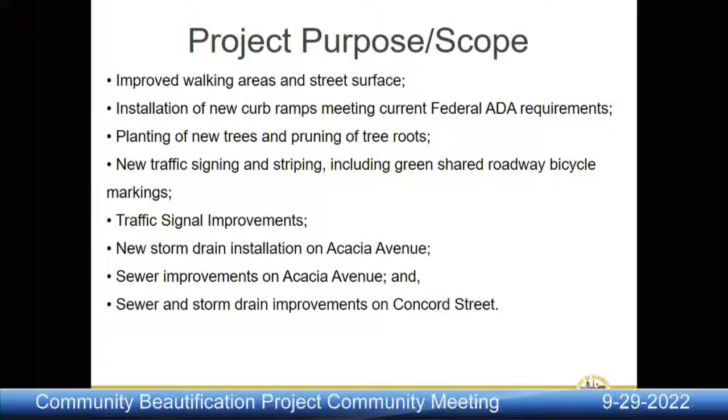Project purpose includes improved walking areas and street surfaces, installation of new curb ramps meeting current federal Americans with Disabilities Act requirements, planting of new trees and pruning of tree roots, new traffic signing and striping installations including green shared roadway bicycle markings, traffic signal improvements, new storm drain installations on Acacia Avenue, sewer improvements on Acacia Avenue, and sewer and storm drain improvements on Concord Street.

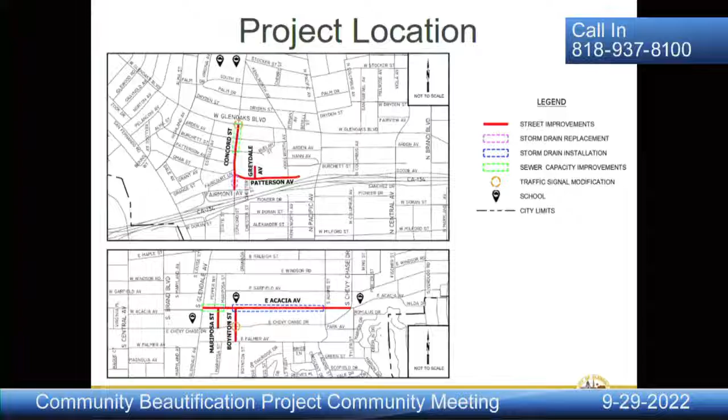Project location: as you can see on this project location map, the project takes place on Concord Street between Fairmont Avenue and Glenoaks Boulevard, Patterson Avenue between Concord Street and Easterly End, Greydale Avenue between Patterson Avenue and Northerly End, as well as another location on Acacia Avenue between Glendale Avenue and Chevy Chase Drive, Mariposa Street between Chevy Chase Drive and Acacia Avenue, and Boynton Street between Palmer Avenue and Acacia Avenue.

Construction phasing: there are 8 phases that will roll out as part of this project. Phase 1 will include all the underground improvements, including sewer and storm drain improvements. Phase 2 will entail concrete improvements. Phase 3 will include asphalt pavement replacements. Phase 4 will include street resurfacing.

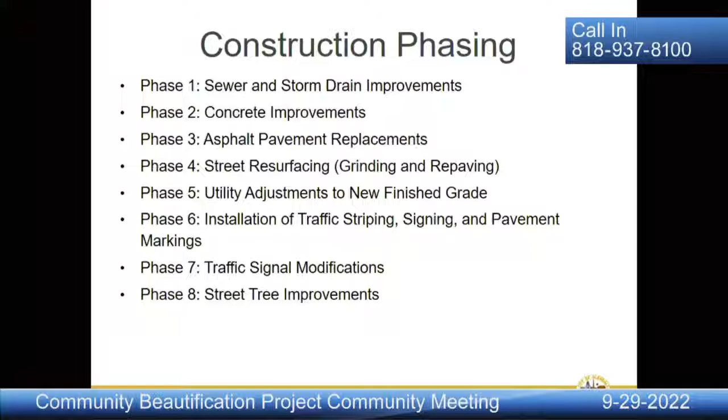Phase 5 will include utility adjustments. Phase 6 will include installation of traffic striping, signing, and pavement markings. Phase 7 will include traffic signal modifications, and the last phase will be street tree improvements. We will go over the phases and details in the following slides.

Sewer capacity improvements include replacement of approximately 580 feet of 18-inch vitrified clay pipe with 21-inch VCP on Concord Street between Burchett Street and Glenoaks Boulevard. It will also include replacement of approximately 535 feet of 8-inch vitrified clay pipe with 10-inch vitrified clay pipe on Acacia Avenue between Glendale Avenue and Mariposa Street.

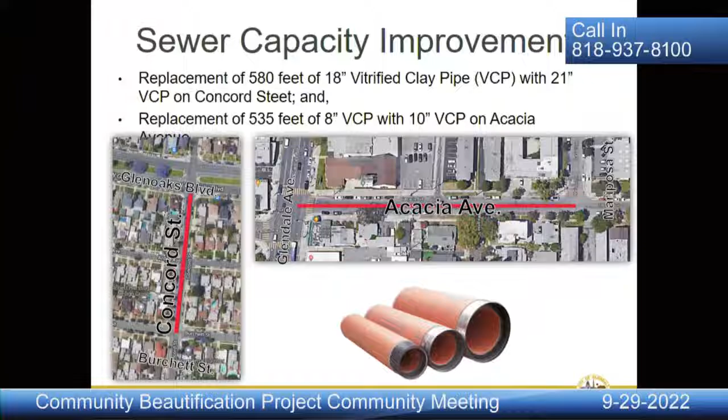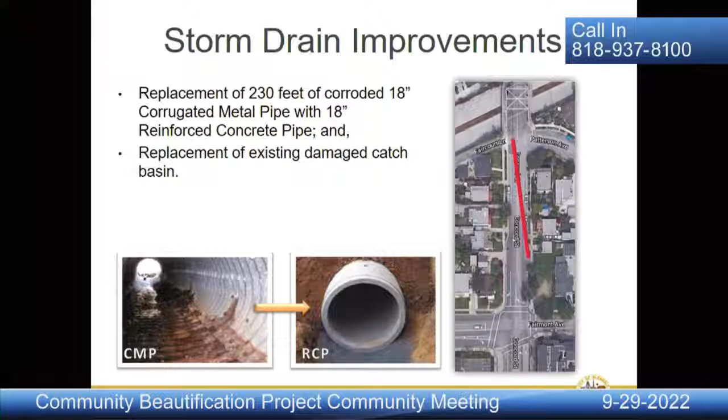Storm drain improvements include the replacement of about 230 feet of corroded 18-inch corrugated metal pipe with 18-inch reinforced concrete pipe on Concord Street between Fairmont Avenue and Faircourt Lane, or Patterson Avenue. It also includes the replacement of the existing damaged catch basin that the pipe connects to.

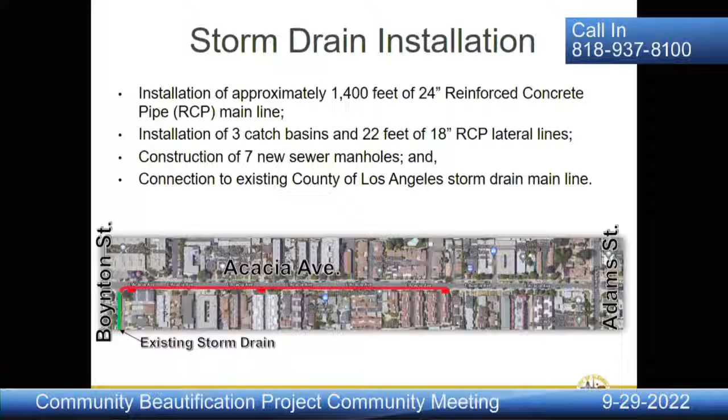Storm drain installation includes approximately 1,400 feet of 24-inch reinforced concrete pipe installation on Acacia Avenue between Boynton Street and Adams Street, as well as installation of 3 catch basins and 7 new sewer manholes along Acacia Avenue. Finally, it will connect to an existing County of Los Angeles storm drain system on Boynton Street.

Concrete improvements include damaged, uplifted, or substandard sidewalks, curb ramps, driveway aprons, alley aprons, curb and gutters, and cross gutters. You can see some of the photos from the project site that will be improved as part of this project.

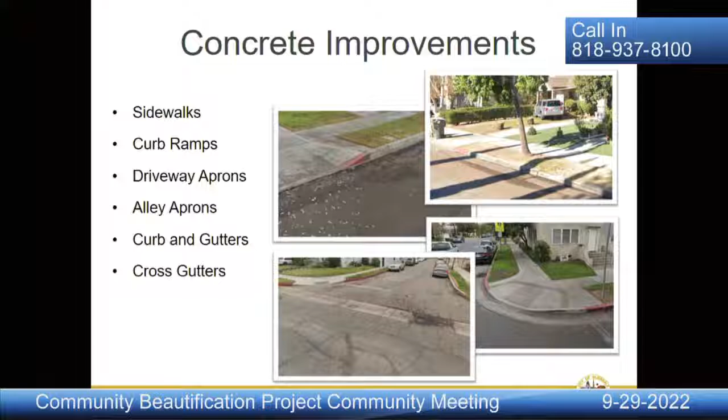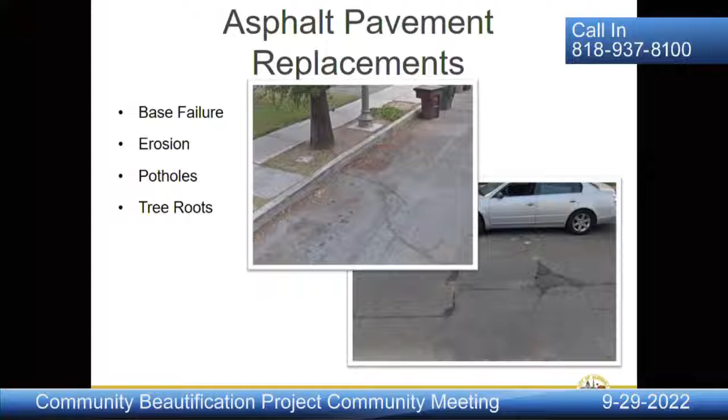Asphalt pavement replacements include removal and replacement of sections of roadway that show signs of base failure, erosion, potholes, and/or have been uplifted by tree roots, and those will be localized improvements on the roadway.

The street resurfacing portion of the project includes grinding of the top 2 inches of the asphalt concrete pavement of the roadway and replacing it with asphalt rubberized hot mix pavement top coat. It's approximately a 1-week process, and it improves the ride of the street as well as the structural integrity of the pavement, beginning a new service life for the pavement.

During the street resurfacing operation, parking and access to the street will be temporarily restricted.

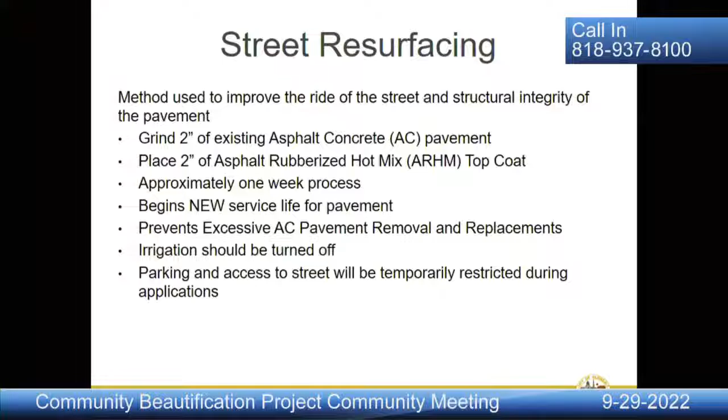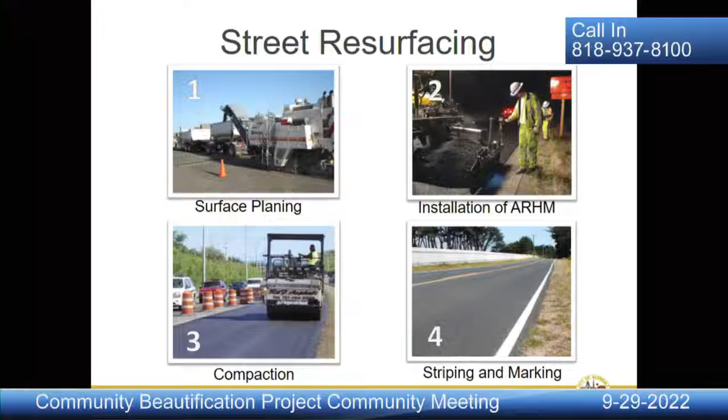Street resurfacing includes several stages. The first is grinding, also known as surface planing. The second is installation of the asphalt rubberized hot mix pavement. Third is compaction, and finally, once the asphalt has cured, the street will be striped and markings installed.

Traffic striping, signing, and pavement markings include the installation of new signing and pavement markers, as well as refreshing and repainting of painted curb markings. It also includes the installation of B-type green sharrows, or shared roadway signs, on Concord Street.

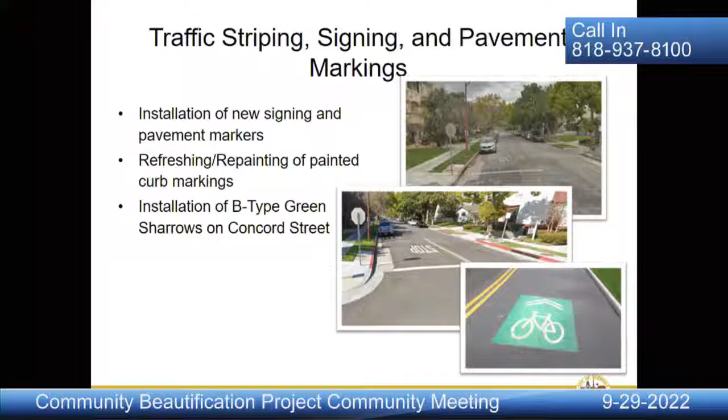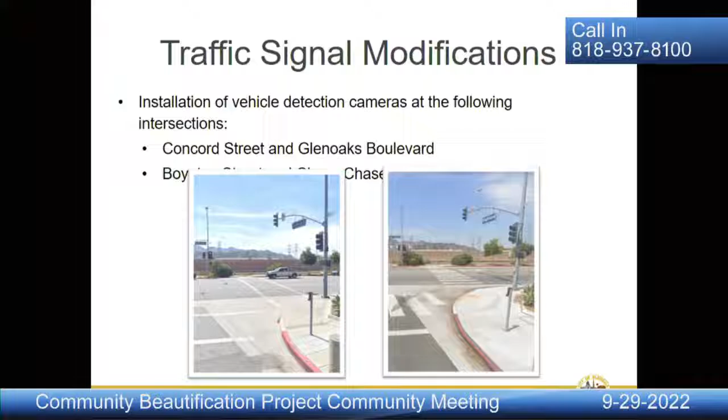Traffic signal modifications will take place at the intersections of Concord Street and Glenoaks Boulevard, as well as Boynton Street and Chevy Chase Drive, and will include installation of vehicle detection cameras.

Street tree improvements, including tree removals, replacements, and planting of new trees, will be per professional arborist recommendations. Trees will be removed only if they are in decline or pose accessibility and safety issues for sidewalks, driveways, and adjacent curbs and gutters. Residents and businesses adjacent to tree removal locations will be notified in advance.

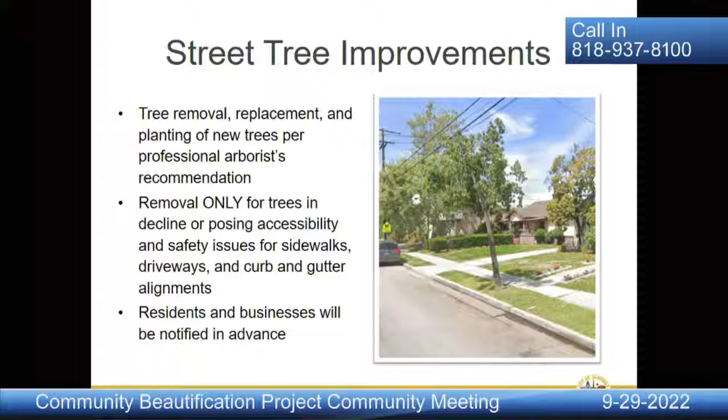Some project impacts include that resurfaced streets may be temporarily closed during construction. The contractor will notify residents and businesses in advance, and street parking will be restricted in work areas. Construction may be allowed on Saturdays if necessary, and construction equipment and materials may be stored on the street.

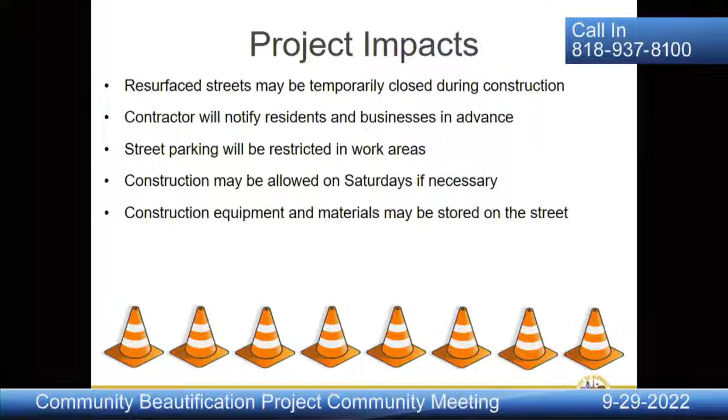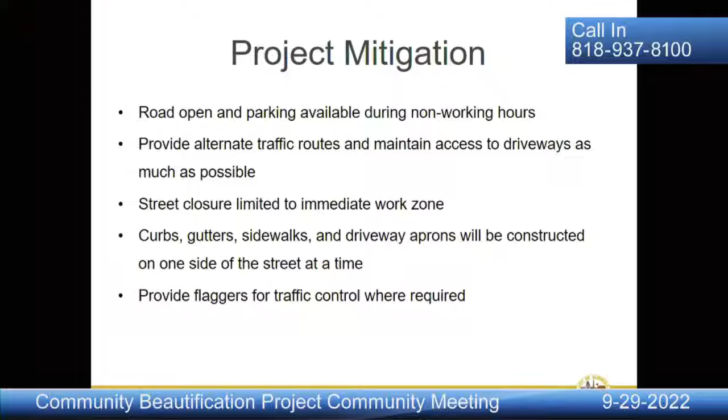Some mitigations for the project include that roads will be open and parking will be available during non-working hours. The contractor will provide alternate traffic routes and maintain access to driveways as much as possible, and street closures will be limited to the immediate work zone only. Curbs, gutters, sidewalks, and driveway aprons will be constructed on one side of the street at a time, and the contractor will provide flaggers for traffic control where required.

Public notification will roll out in about six stages. The first stage is the virtual community meeting, which is today. The second is the city website, where all project-related information can be found, as well as the advertisement of the project, which will be posted on the project site.

The Public Works Director's letter will go out to the affected neighborhoods about one or two months before construction starts. Then the contractor will take over notifications with two-week door hangers, distributed two weeks before the start of concrete improvements, another three-day door hanger three days before the concrete improvements, and another three-day notification three days before the start of asphalt roadway improvements.